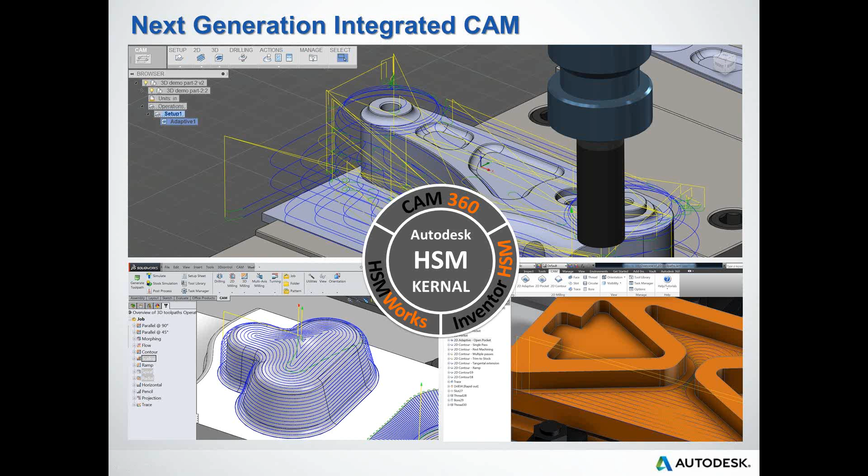Based upon our high-speed machining kernel, which is what HSM stands for, Autodesk has released 3 product choices for our customers: HSM Works, a fully integrated solution for SolidWorks; InventorHSM, a fully integrated solution for Inventor; and the first cloud solution, CAM 360, which you can do CAD and CAM with.

So why choose an integrated CAM solution? According to the July 2014 CIMdata report, the fastest growing segment in CAM software solutions is integrated CAM. Integrated CAM leverages the existing investments a company makes in their CAD tools. Because of this, the typical 8-step machining process, and of course the 16-step machining process where an ECO is involved, is greatly reduced when the CAD data is leveraged.

Reducing the steps to updating CAD data, regenerating and validating the toolpaths, and posting your code allows the NC programmer and design engineers to take control of their NC programming process. Many downstream benefits include ETO automation, streamlining communications, true work group collaboration, ECO accuracy, and faster turnaround time. There are a lot of players in the integrated CAM space, and Autodesk focused on just one, HSM Works.

The founders of HSM Works shared the Autodesk innovator vision. When you consider major advancements in the CAM industry, you will find an HSM Works founder behind them, including the birth of adaptive clearing, which became the basis on which high-speed machining, or HSM, was built, and a lot of first-to-market options, both technological advancements like distributed CAM and the first-ever CAD/CAM cloud option, and business benefits such as a free post library, open API, and flexible purchasing options to meet the nuances of each type of company.

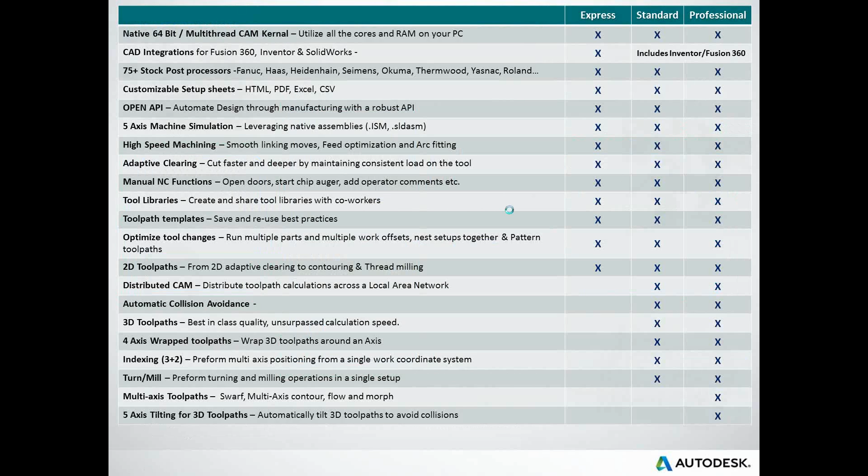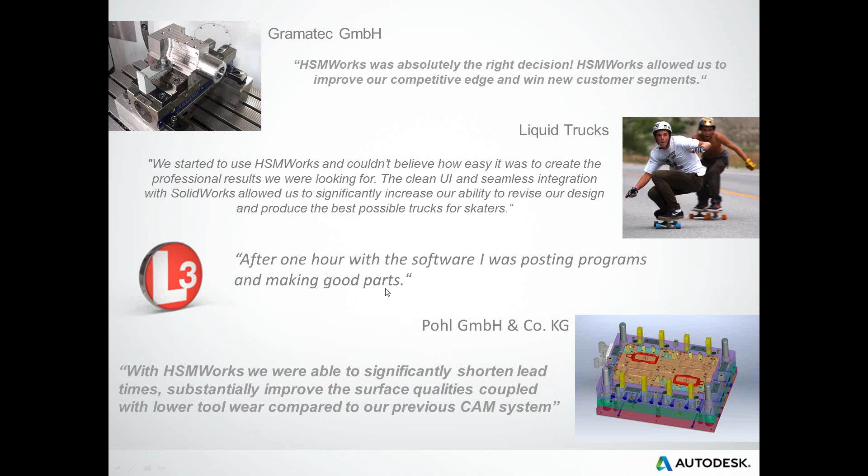These are a couple of examples of companies that currently use our workflow and the success that they've had. So now with that, we'll go ahead and move into our demonstration.

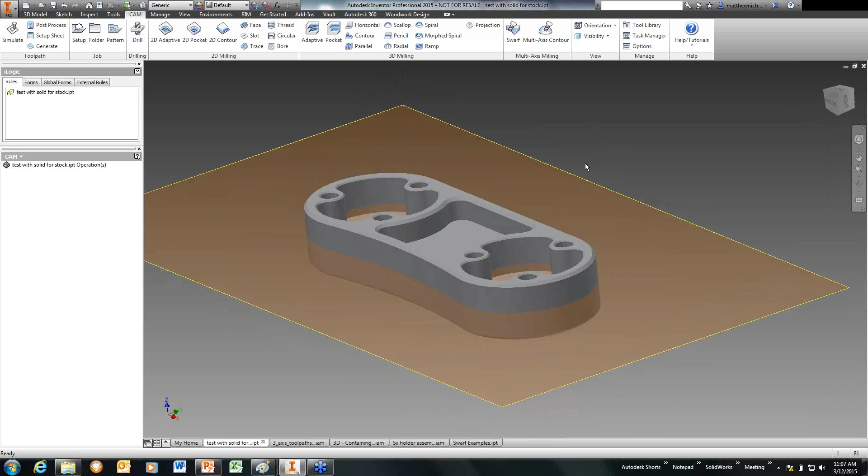So first what we're going to do is look at the 2.5 axis side of the program, just briefly. You'll see here I've got a part with multiple pockets and some drilling operations.

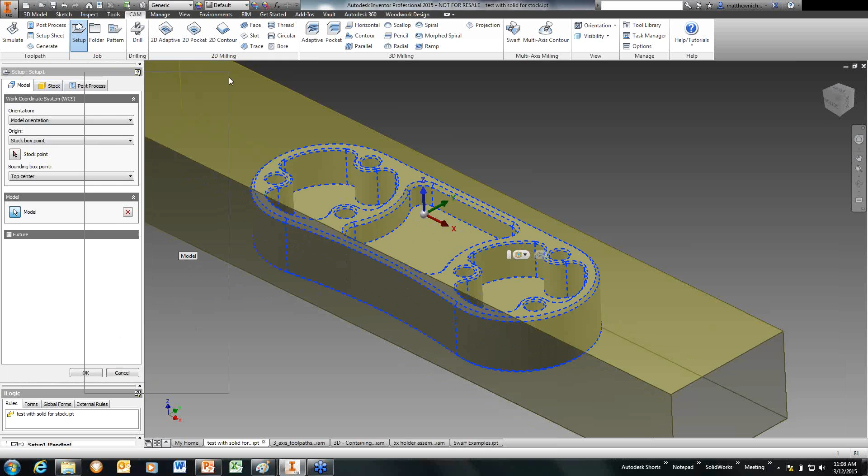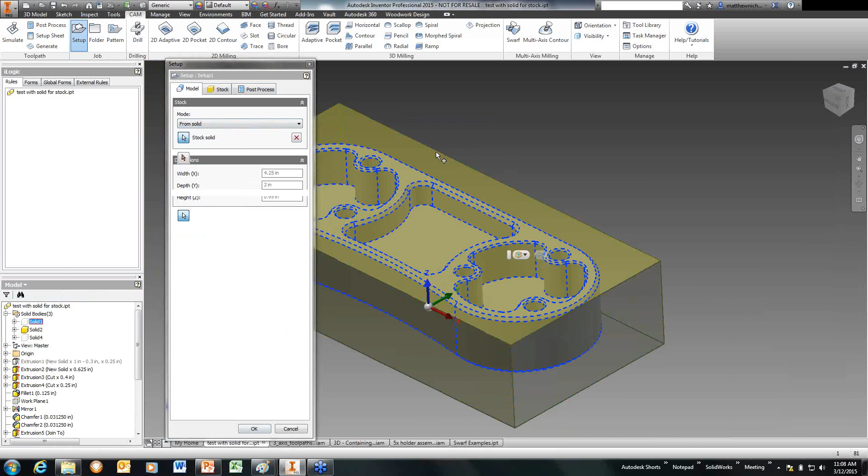So what I want to do is first create a stock setup. Here I'll select my model. One thing you'll notice is they've made it really easy to define your stock. There are multiple different stock options, and for this one I'm going to create a from solid stock, so I can go back into my model, which I've created multiple solid bodies, and pick my stock solid from there. Once I've defined my stock point for my work offset, I'm ready to go.

So I'm going to start off with a simple face milling operation. I'll click face mill, go into my tool library, click my 2-inch face mill, hit select, and hit OK. Notice how quick it generated that face mill operation.

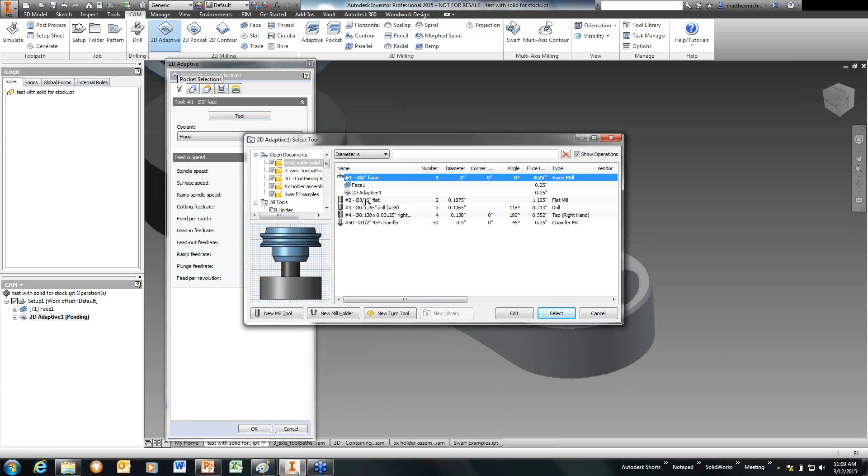Next, I want to come in and clear out these pockets. So I'm going to go into my 2D adaptive, again go into my tool library, pick my 3/16 inch flat mill, select it, and then I'm just going to select on the pockets, or I can even select on the contour. Click OK, and I've already cleared out the pocket.

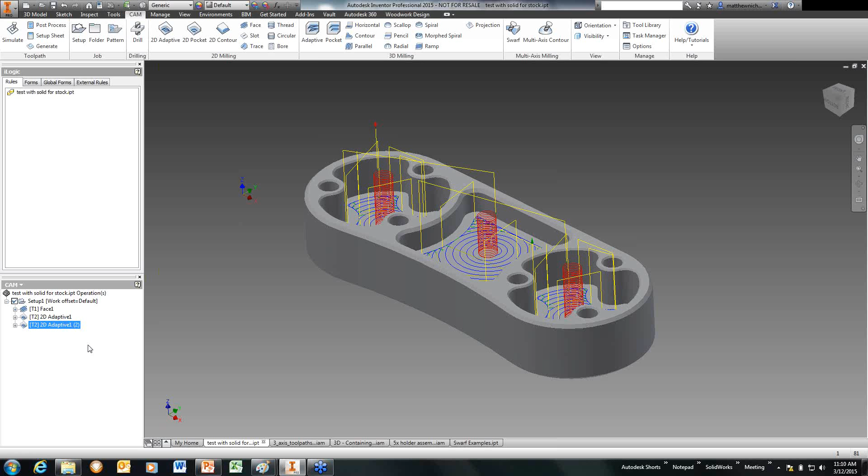Now say I want to go in and clear out the rest of the material around the outside. One thing you'll notice is if I make changes to feeds and speeds in here, say I come in and make it 7,000 RPM instead of 5,000, that modification won't automatically update into my library. So if I wanted to keep that change in my next operation, I can right-click and click Duplicate. This way it quickly makes a duplicate operation of what I just created, to where all I have to do is go into my Geometry tab, clear it out, and pick the outside of my part. So now, in a pretty quick 2 operations, I've been able to rough out the inside of the pockets and rough the outside of my part.

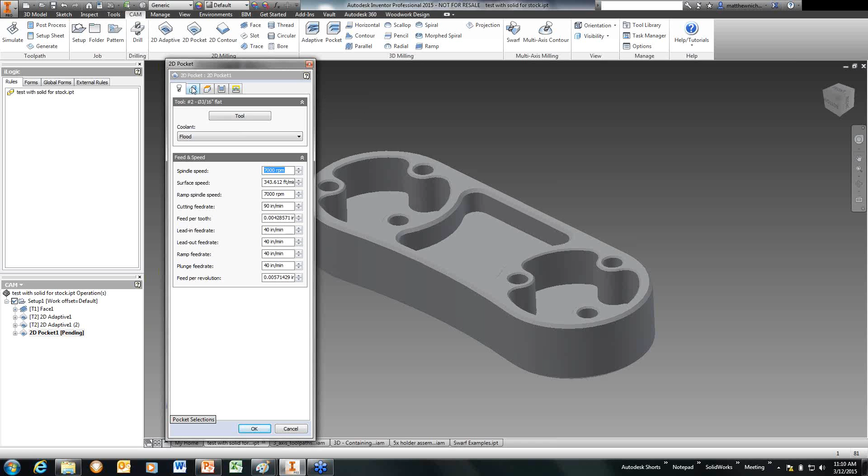So now let's say I want to come in and do my finishing passes. Again I can right-click on my operation and derive the operation into a 2D pocket. Notice my feeds and speeds stayed along with the tool and my geometry selection. So here what I would do is go into my Passes tab, which is what defines all the cutting parameters, and remove stock to leave.

Again, I can right-click on my outside pocket, or outside contour, and create a derived operation, and this time I'm going to do 2D contour. Notice the stock to leave was already turned off, so here all I have to do is hit OK.

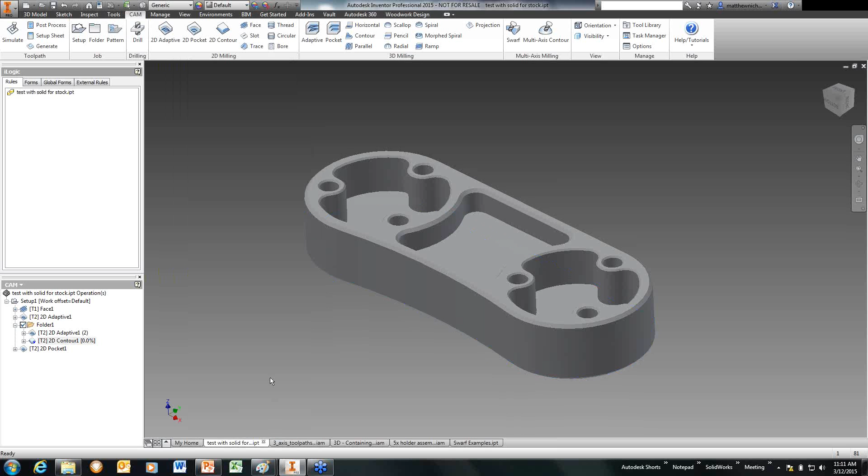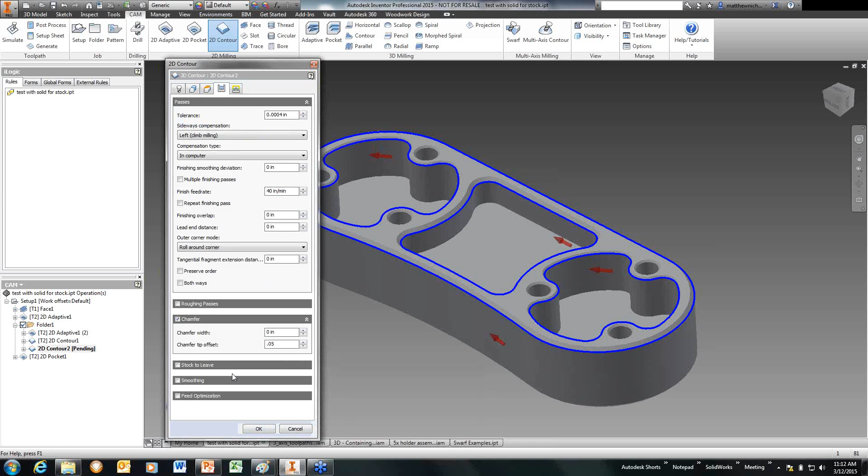So let's say I go in now and want to do my contour around the edges with the chamfer bit. I'll pick 2D contour, go into my tool library, and pick my chamfer bit, then select all my chamfers. Now you'll notice one thing Autodesk has done is they don't want to clutter your user interface, so never before have I had this chamfer option until I add it, so you're not having to go through all the options - they just pick the ones viable for that situation. So here I'm going to put an offset of 0.05 inches, click OK, and there's the toolpaths.

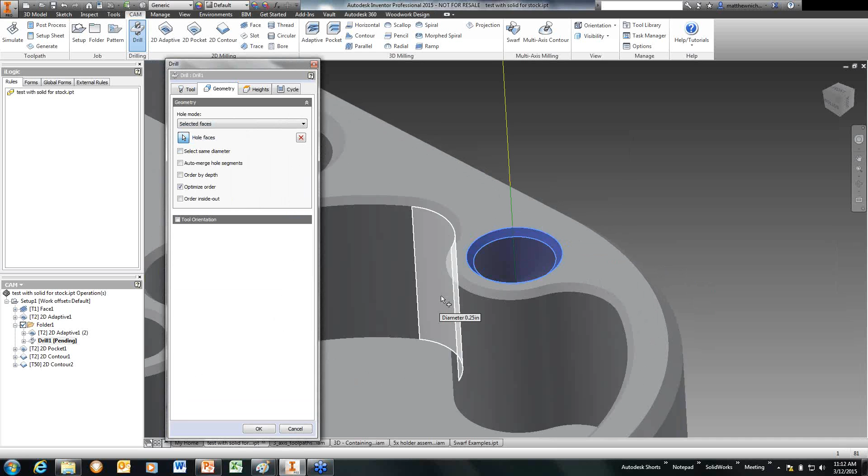So what I want to do is use that same chamfer bit, and I'm going to spot drill these holes. I'm going to go into drill, pick my chamfer bit, and all I'm going to do is pick the cylindrical face of one and select same diameter. So it goes in and quickly finds all other faces that are similar, so I don't have to go in and pick all of them.

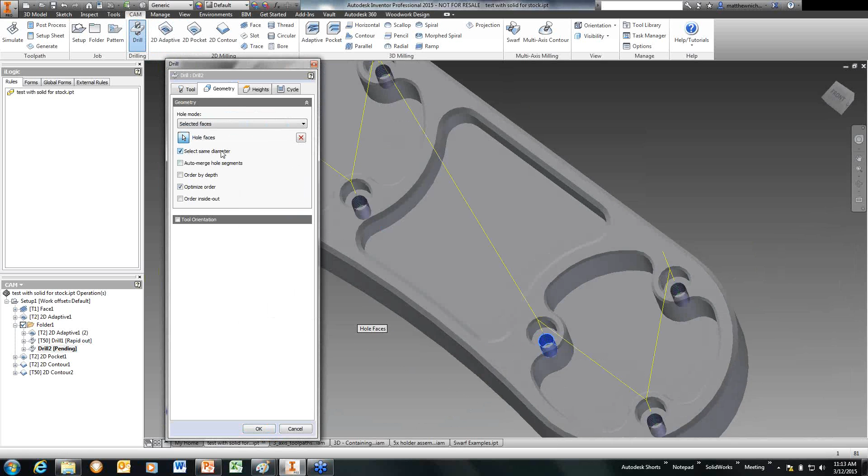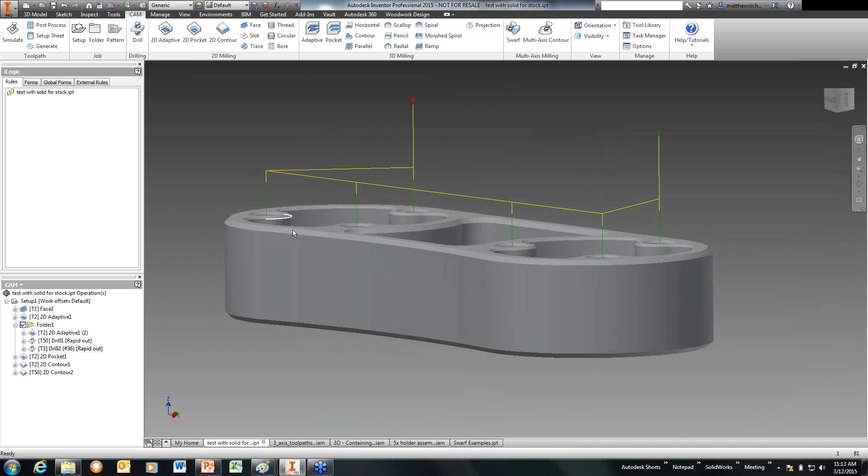Next we're going to go ahead and pre-drill the hole for the tap. Again, I'll pick my drill bit, select the small diameter, and I can do select same diameter. One thing to notice is the cut isn't going all the way to the top, but I want to make sure my bit's going to clear all the material. So I'm going to pick auto merge hole segments so that it finds everything, so I don't have to worry about losing bits in the process of machining this. And there we go - again, I can go into my tool library, pick my tap, geometry, select same, auto merge, and there we go.

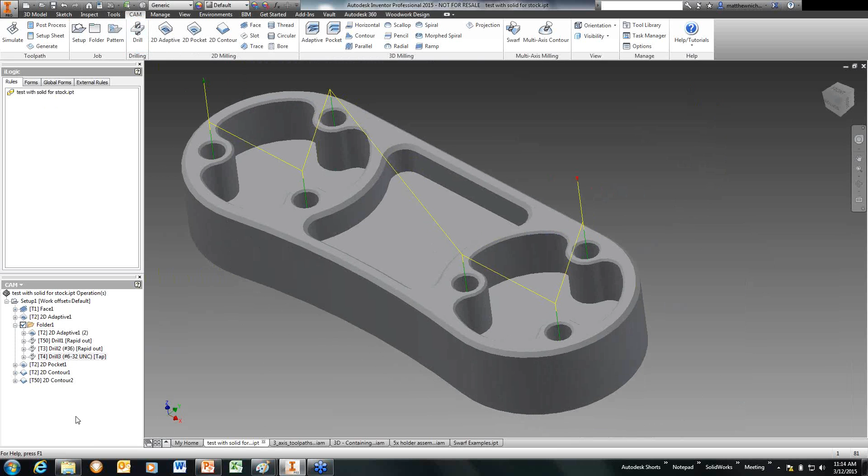So basically we've done that in just a few minutes - we've already machined that whole part. So now what I want to go ahead and do is a simulation to verify that I've actually cleaned everything out.

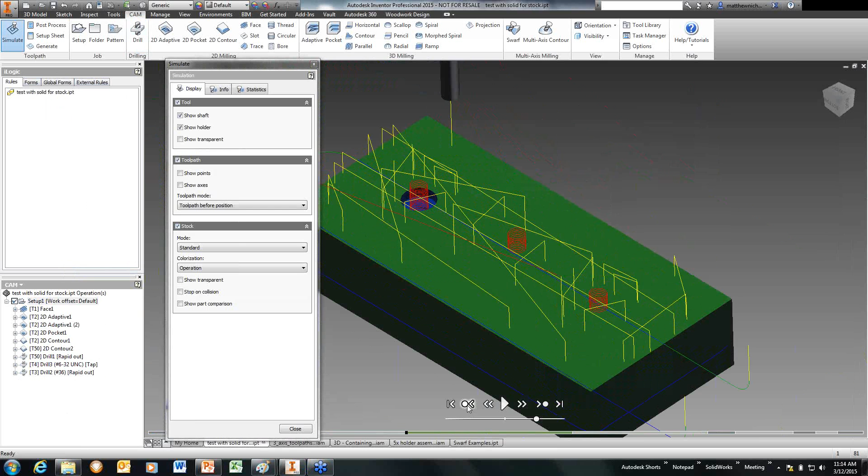So I'm going to turn on my stock and go ahead and simulate. Now one thing that's available in HSM Standard and HSM Pro is the ability to do a part comparison, where I'd be able to turn on and see the material that I have left to machine from what I'm wanting to machine to.

One thing also that you can do is you can make transparent your tools and holders. Now that this is done on the machining part, I can go ahead and do show comparison. So now you'll see everything in the dark blue is material that's still left on the stock comparative to what I'm trying to machine.

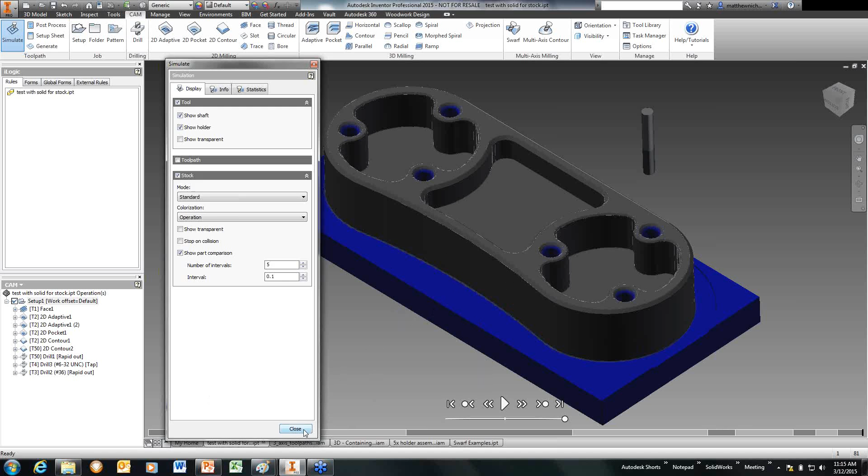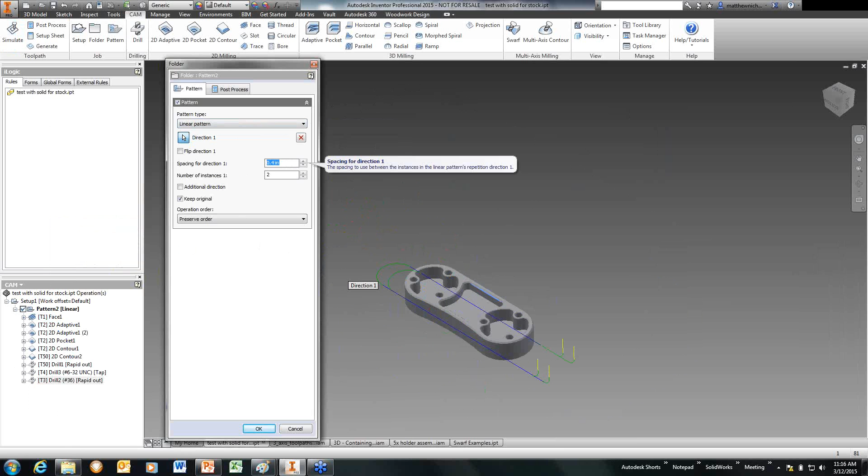Now another thing that you can do is, say you have a pallet situation where I have multiple of these parts sitting out. There's different ways that you can do patterning operations. One way that I can do that is I can select all my toolpaths, add a new pattern, and I can create either linear patterns, a circular pattern, or... So what I'm going to do is I'm going to pick this edge. I'm going to say I want to offset it 5, and say I want to do 2 instances. I'm going to say OK.

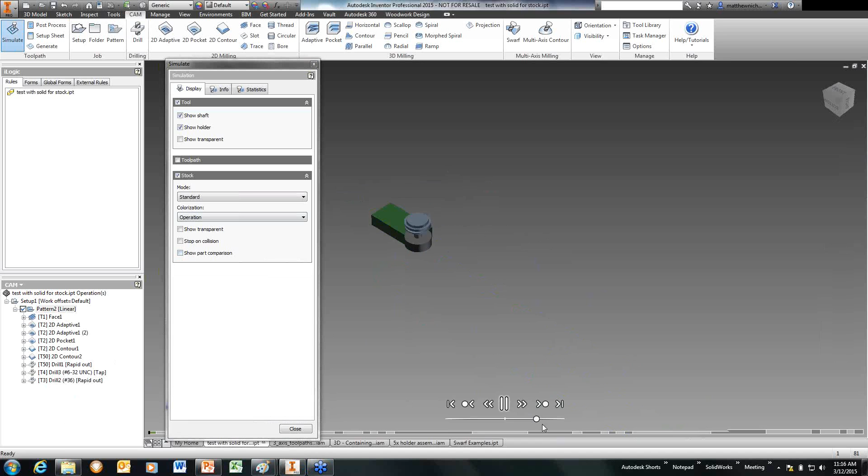So now you'll see that if I was to do a simulation on this as well, the stock's only going to show up for 1. But as you can watch, it does the simulation now on the side too. And if I show Toolpaths, then you'd be able to see it. So there's multiple ways of getting things done that are either the same, or even if they're different, you could pattern with those operations.

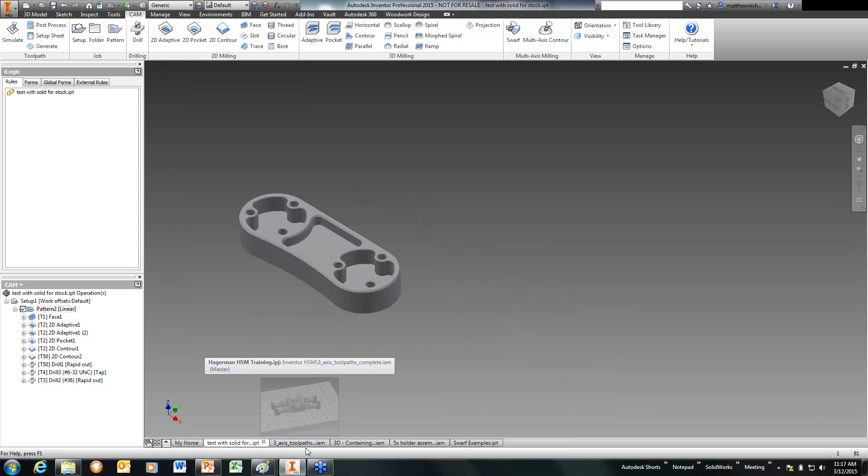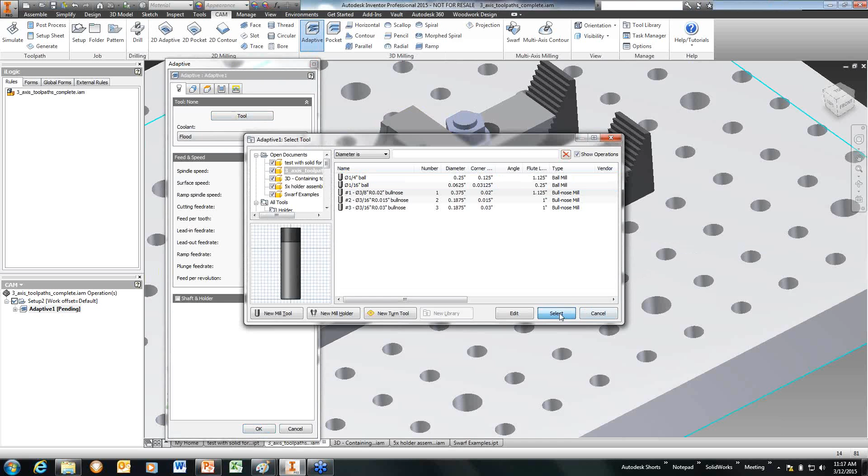Okay, so that's the basics of our 2.5 axis milling. Now let's go ahead and go into the 3 axis milling. Again here, I've got a die piece. I've already got my stock set up. So I'm going to go ahead and start putting in toolpaths. I'm going to go to my 3D adaptive milling. I'm going to select the tool, pick a 3/8 inch bull nose. And with this one, all I'm going to do is hit OK. And what it's going to find is all the open space that it needs to machine out. So there, within a few seconds, it's already developed a toolpath for me.

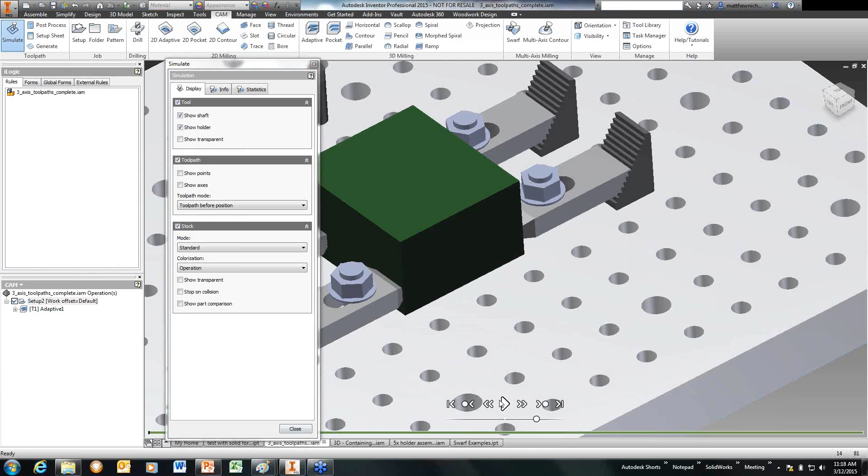So as that one's going, I can go ahead and start a new horizontal one. And I'm going to machine the top of this part, or the top of this feature. So with the same bull nose, I'm going to change my height tab to be just below the top of that part, so that it won't see the top. I'm going to click OK. And notice now I've got a horizontal toolpath on the top of that feature.

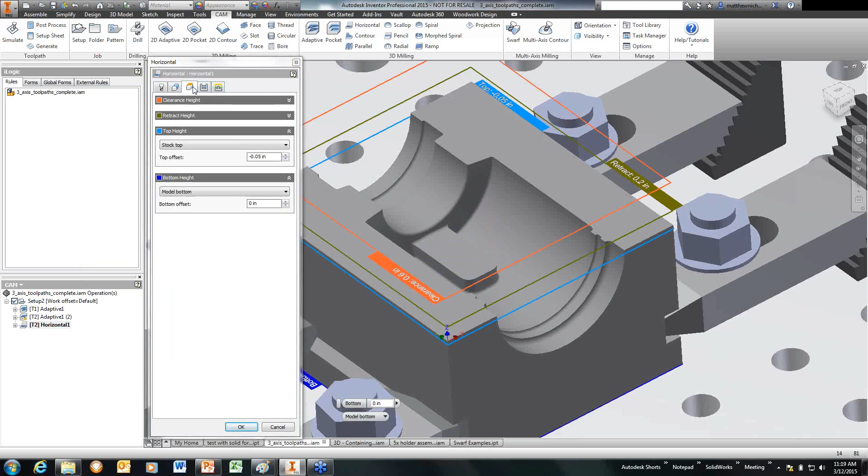Now I could also go in, instead of changing my height tab, I could also just pick the surface, and then that would do the same. It's already calculated for that second adaptive clearing that we've done. Now what I want to do is I'm going to go in and start doing my finishing passes. So what I want to start with is a parallel move. And for this one I'm going to do a 1/4 inch ball.

And then what you'll see over here is I've got the option to do slope now. So I'm going to do my slope. And I'm going to change my to slope 35 degrees. So now with that, notice it's gotten the top of the part, which I'm not wanting, but now I've also got my contour down in here. So let's go in and edit this real quick. If I go back to my geometry tab, you'll notice it's avoid touch surface. I can click the top of the surfaces that I don't want to touch.

And let's say I want to change my step over. So I've got a 0.125 step over. Let's say I want to do a 0.05. And so now you'll see it's missing the top, and the top of that surface. It's turned 35 degrees, and I've got a finer step over than what I originally had.

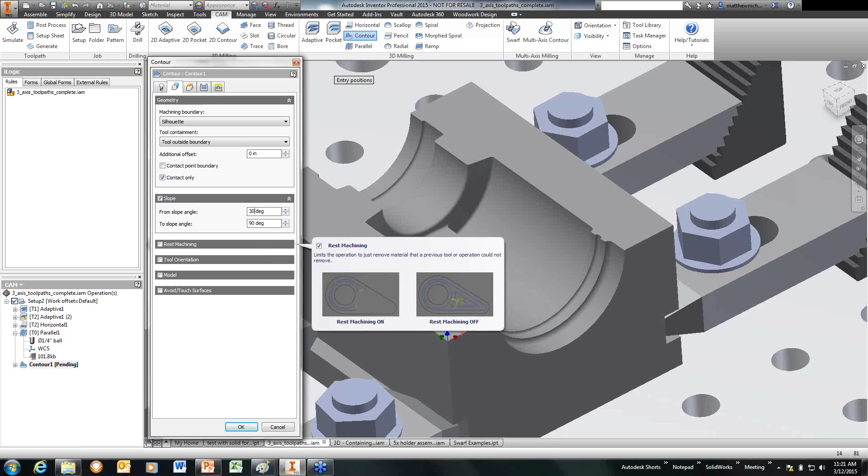So next I'm going to go into the contour with the same 1/4 inch ball. Again, I'm going to do a slope. This time, instead of changing the to slope, I'm going to change my from slope to 30 degrees. This way I have a 5-degree overlap, so I make sure I don't miss anything.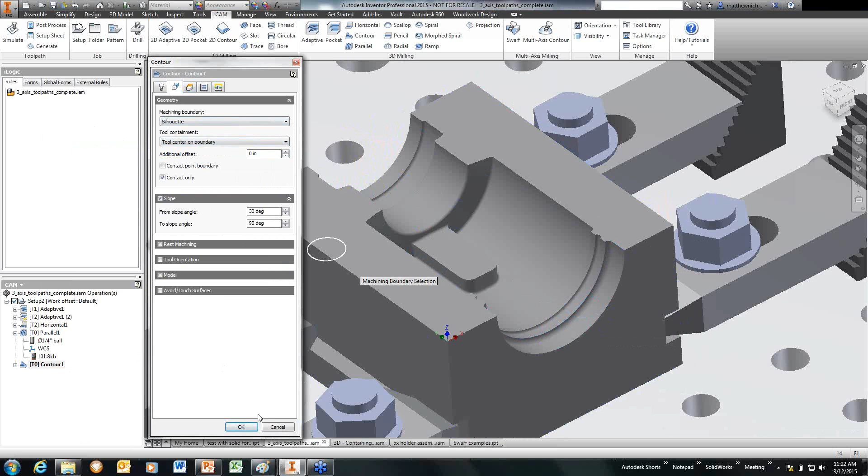Okay, so you'll notice that I got the outside of the part. Now, the way to get rid of that is tool containment to center. That way the center of the tool goes to the edge of the part. It doesn't go past. And finish that again.

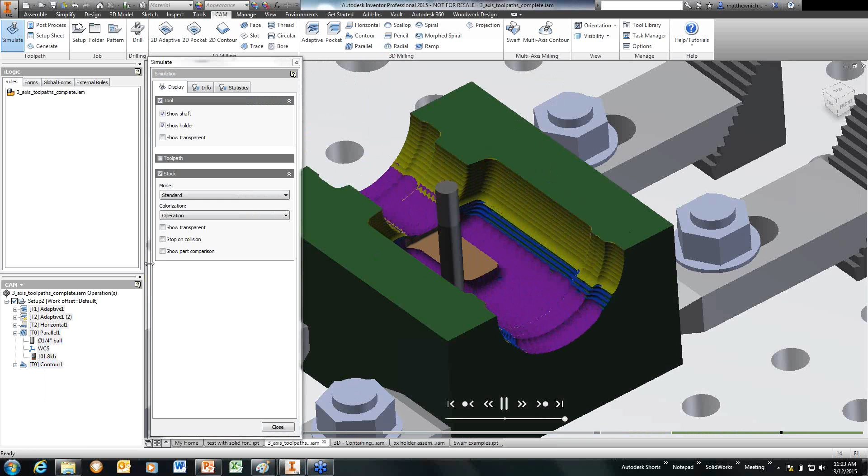And the last thing I'm going to do is, if I go ahead and simulate all this, that will be in here and here and around in this area. So what we're going to do with that will be a pencil command so that we can finish those radiuses off and finish the part. So notice the dark areas and the radiuses.

Okay. So with that, I'm going to go into my pencil operation, pick my 16th-inch ball mill, and I'm just going to go ahead and hit OK and see what I get. So I've got the smaller radiuses, but I'm missing the larger radiuses. So let's go in and edit Toolpaths.

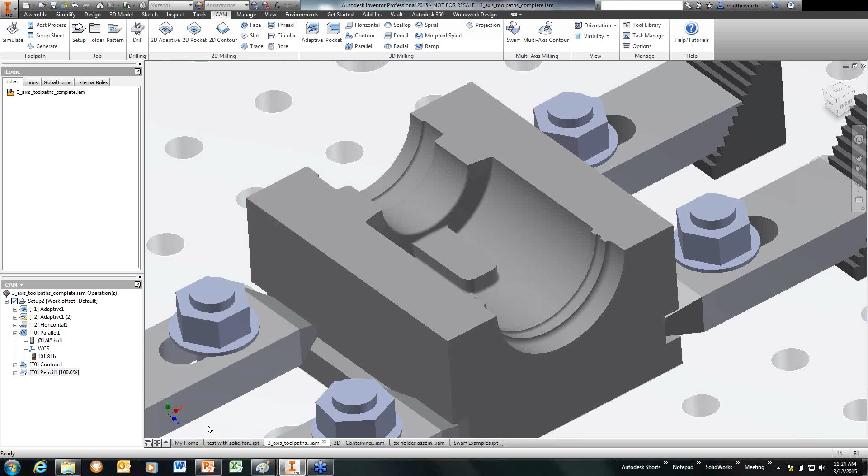So I want to come in here and change my over thickness to 0.125 so I can find the larger radiuses. And I'm going to change my step over to 0.02, and I'm going to limit the number of step overs to 4 so that I don't go too crazy. So then you'll see once that gets done calculating that I've gotten all my radiuses, got 4 step overs, and it's a really fine finish.

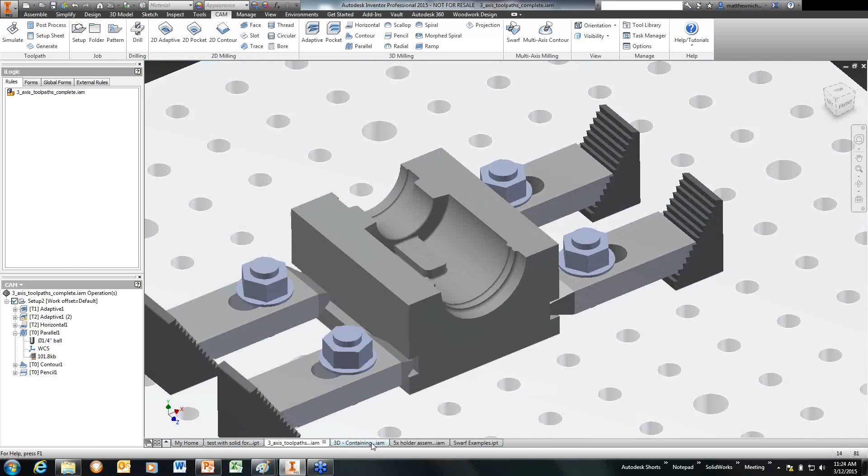So that was a pretty quick and easy way of being able to mill out that die in a little number of steps. So next thing I want to do is show some of the other capabilities that 3-axis milling has. So you saw earlier I used the parallel command to do some of the finishing on different slopes. So here's a way you can see parallel going over the whole part.

And then here I'm containing it to a certain pocket. So by selecting the geometry around the pocket, it limits it to that area. I can also limit it by selecting certain geometry. And then the outside of the part, it's going to contain it to just that area. And then also if I do this, I'm defining my top and bottom height, so I'm containing it to a certain section of the part as well.

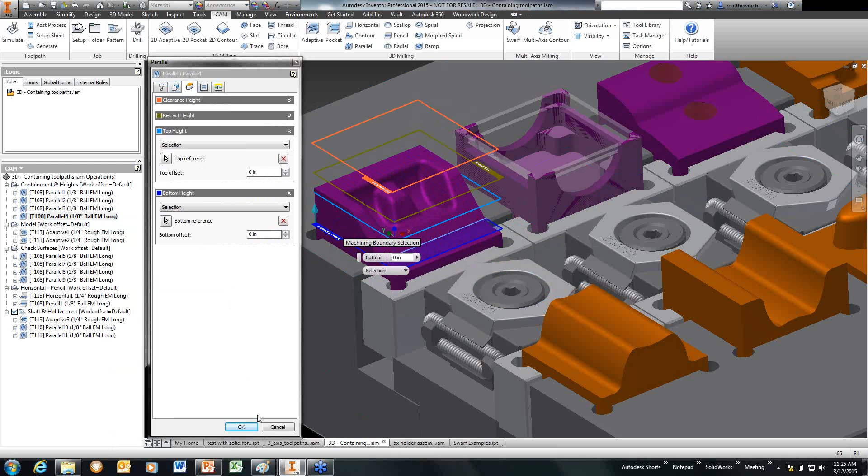Now if you have a part like this one, where it's got cuts through the outside of the wall, but you're not wanting it to mill that way at first, as this one does, you notice whenever it goes in to mill this part, it cuts through the outside of the wall. Say I wasn't wanting to do that whenever I first cut that part. I just want to hog out the inside and then come back and do a cut to finish the outside.

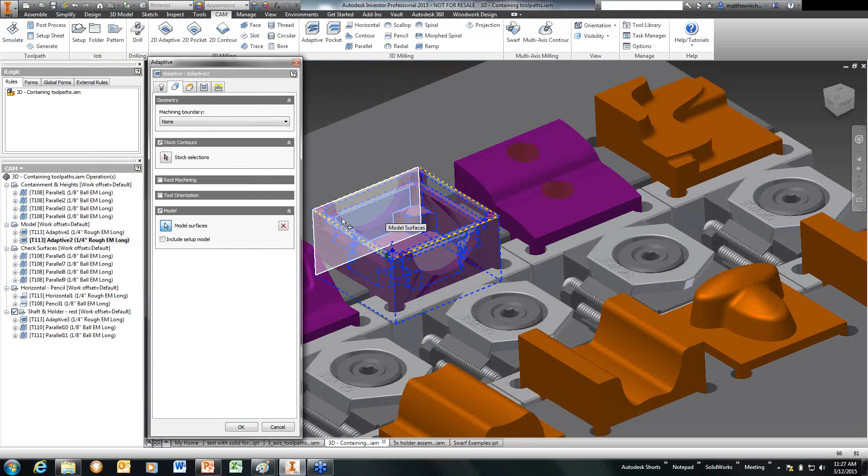If I go in, notice I've got kind of a transparent body on the outside that's the same size as the part, same features as what I want to be machined from, so that it's not actually machining the outside. So then by doing that, I'm able to rough out the inside of it without disturbing the wall structure.

Another one is check surfaces. So say you got a part with a hole through it, like this one does, and you see this parallel goes down into the hole. The way to get around that, or to go over that, is to create a surface that just covers the top of that pocket so that it recognizes that. And by doing that, I can select it as geometry that I want it to include so that it mills that out without going into that pocket, so I can drill that out later.

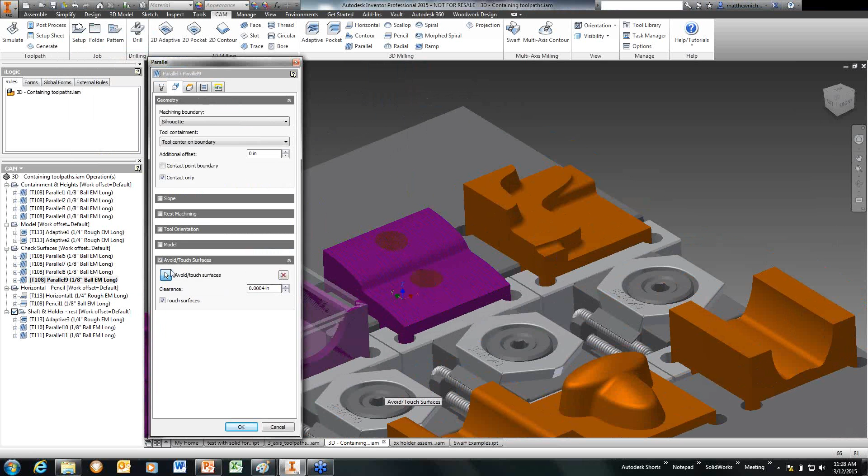And then again, you can do it with the surfaces so that it just goes up to it and doesn't actually touch it at all. Or I can tell it just to touch those surfaces by themselves, and it doesn't even touch the rest of the part, by turning on touch. And notice I've got those two pockets selected.

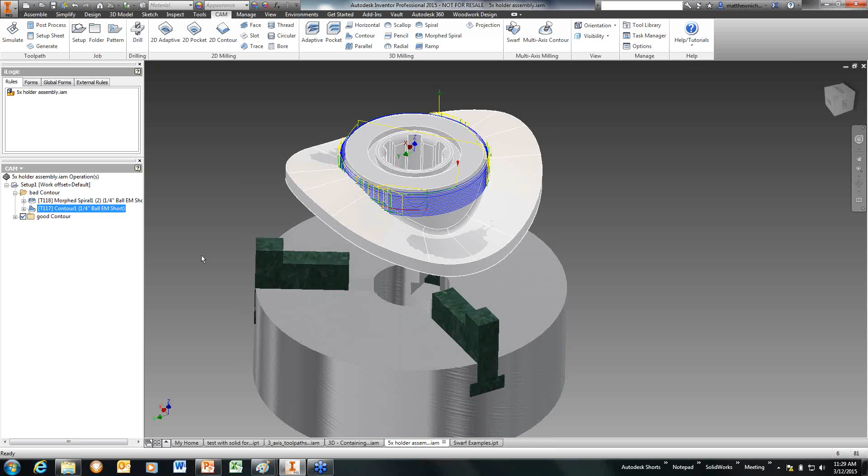Okay. Now let's go ahead and look at some of the capabilities that have been added with the HSM Professional version. So one thing you'll notice, I've got my part in the wall. So I've got my morphed spiral, which machines that contour. And I've got my actual contour that I'm trying to use to machine the outside of this wall, or this diameter of the stock. So what you'll notice is I've got that face selected as a touch.

But what I've got here is this shaft and holder option turned on. So if I want to make sure that I'm not hitting the shaft of the tool or the holder on the stock or the model of the part, I can turn this on. I have multiple different options. As you can see in the pull-down, I can do a pull away, which will pull the tool away from the model so that it doesn't hit.

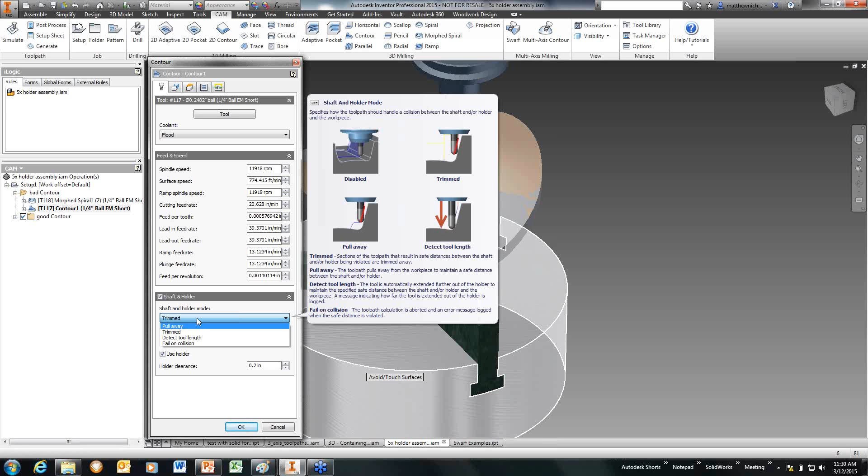I can do a trimmed option, which limits the length of the tool path depending on where the shaft of the tool or the holder would hit it. Fail on collision does what it says. If it detects a collision with the shaft or the holder, it automatically fails that tool path. So for this one, I've got it set to trim.

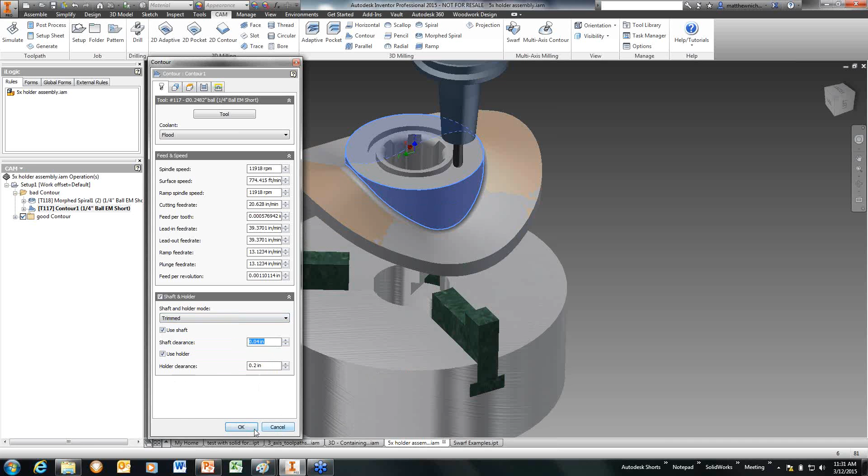I've got my shaft clearance at 0.04 and my holder clearance at 0.2. Now what you'll notice is with that trimmed option, I've only gone halfway down, three-quarters of the way down that part, but I need to get the rest of this.

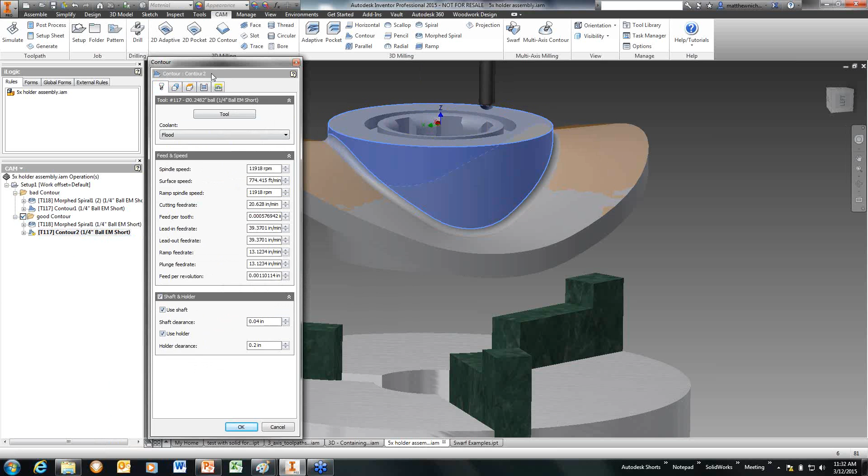So if I do a contour command, the new thing with HSM Pro is the ability to have this multi-axis tilting. With that multi-axis tilting turned on and your shaft and holder options still turned on with the same parameters, I'm able to tell it if you hit the stock or the model, tilt so you can clear it. So I've got my maximum tilt angle set to 90 degrees. What you'll see is I'm able now to go all the way down to the bottom of the part where I need to get a smooth finish.

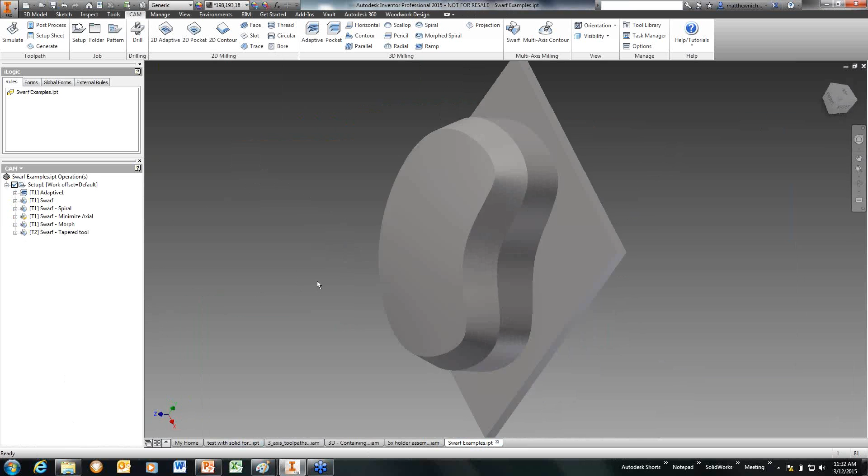Now next we're going to go in and look at some of the multi-axis milling operations. So with HSM Pro, you get this panel on your ribbon with swarf and multi-axis contour.

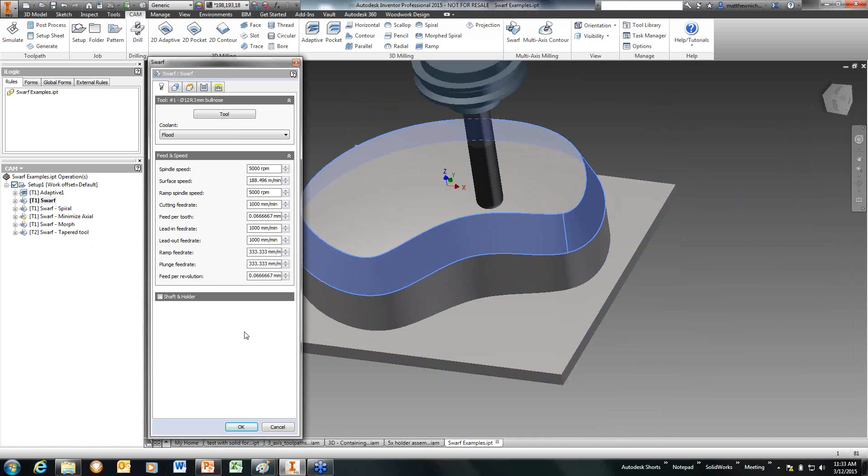So I've got this part set up. I've done my adaptive clearing to get most of the material off. So now I want to go in and create some finishing passes on it. With swarf, there are multiple different options again - it's not just one toolpath. There are multiple different settings that allow you to do what you need to do. One great thing about how HSM works is whenever you hover over any option within your toolpath, it gives you a pop-up that does a very good job explaining what you're actually getting.

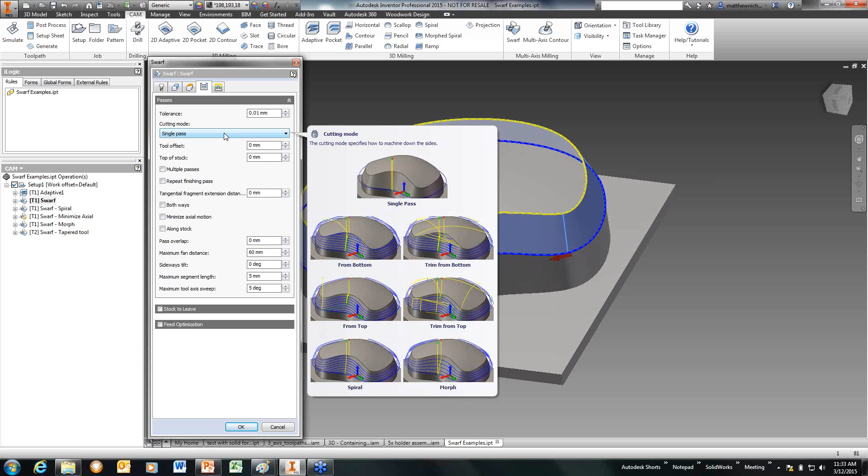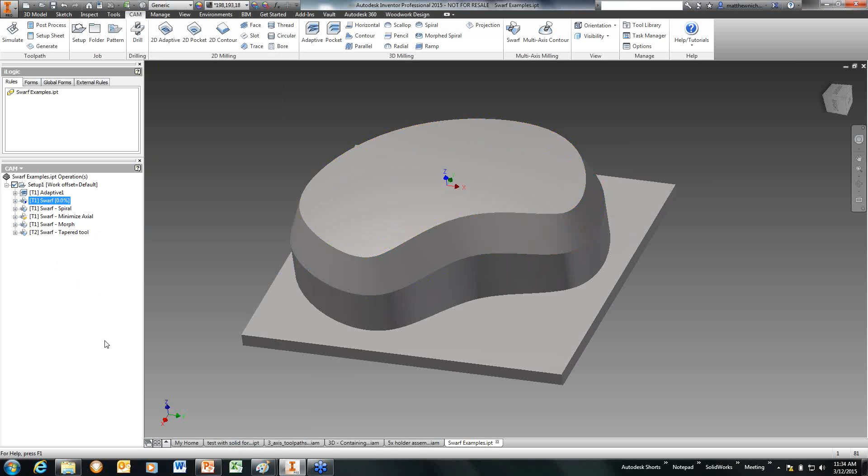So you'll notice this one I've got set up as a single pass. I come in here, pick my surface that I want to machine. It's driving by contours, and my selection mode is faces - again there are different ways you can do it. I can do either contours or surfaces. On my selection mode, I can do faces, contour pairs, or manually. So that's a swarf single pass.

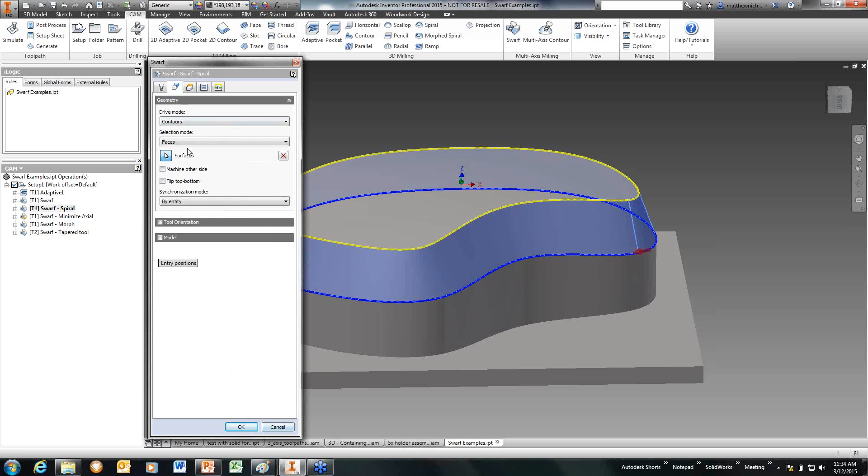Now if I go into the swarf spiral, this is what you would get. With this one, I've got my step down set, so it knows how far to step down as it goes. And again I've picked it by this face. So this one is minimizing axial, which just minimizes the amount that it goes into that curvature, as you can tell by the toolpath.

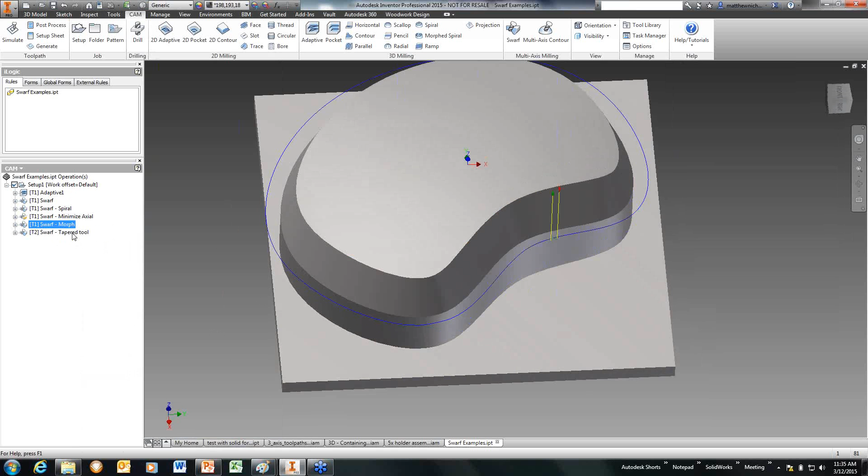And then I've got my morph move, and on this one I'm using an actual 5-degree taper tool. So if I was to go in and simulate this one...

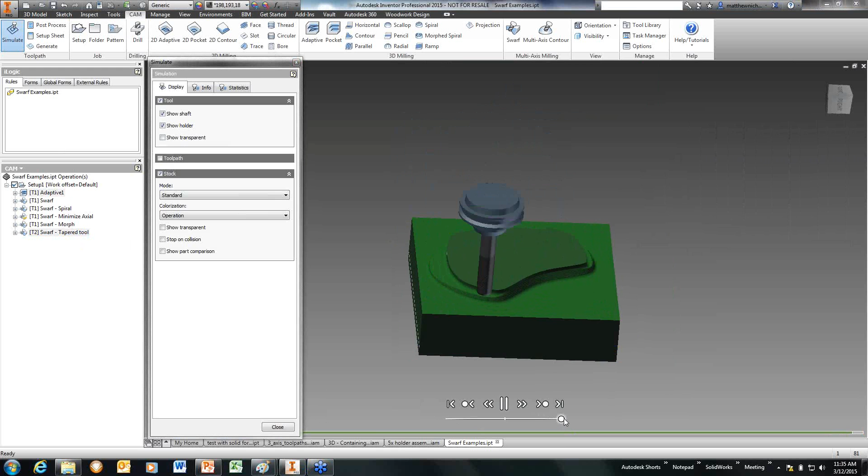Again, I'm doing my adaptive clearing to remove the excess material to get it down to where I can do my finishing passes.

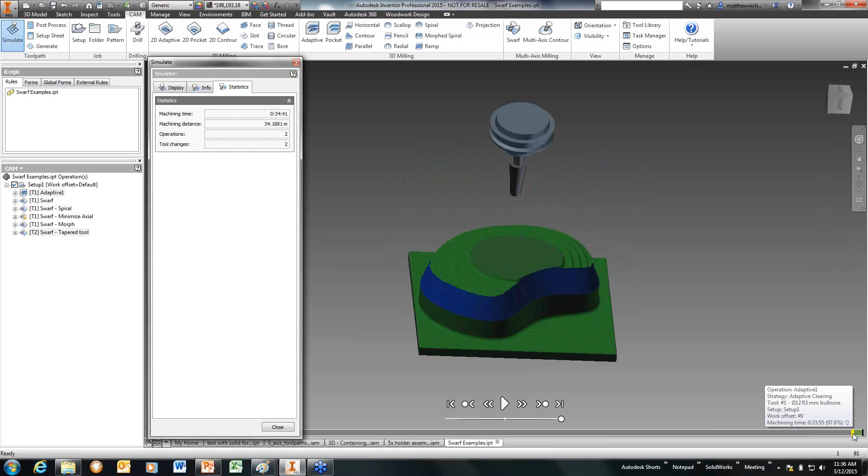So while doing this, there are 3 different tabs you can use within the simulation. The Info tab gives you all the XYZ positioning, the operation information, and also information about the toolpath, giving you an idea of what the machining time is. I'll do this one - notice with this one I've got a longer time, showing 2 operations and 2 tool changes.

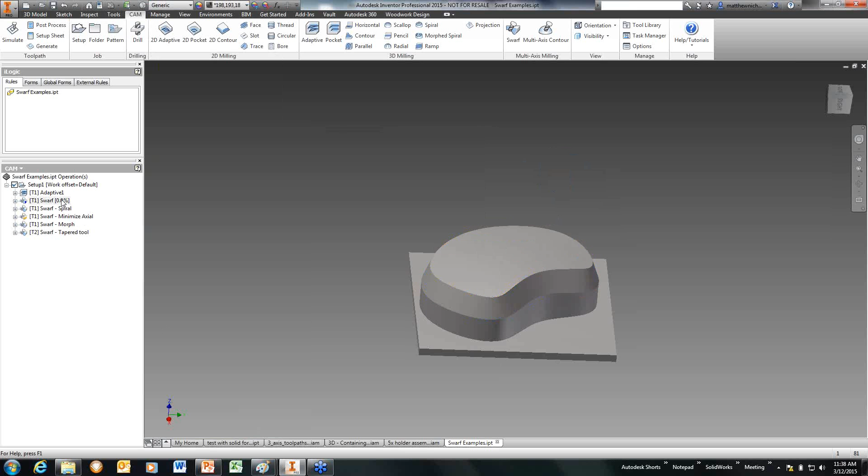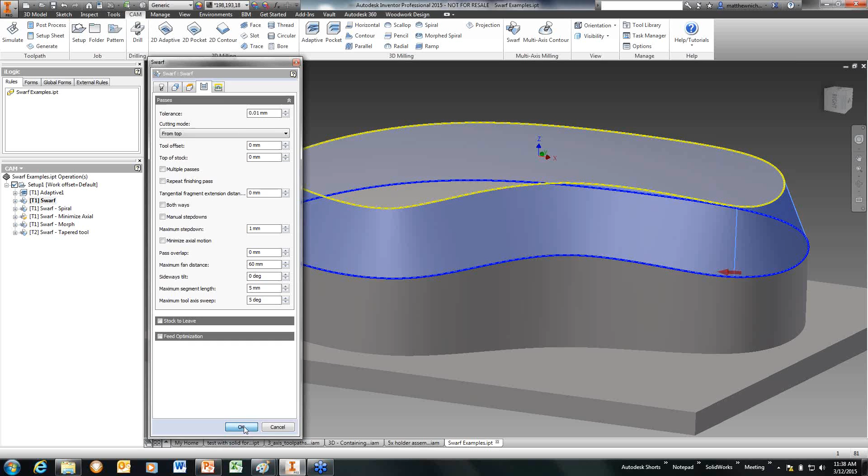So one of the things we didn't show was if I do a from-bottom operation, you'll notice that the toolpath actually does the swarf around the tool. And then if I come in and change this from top instead, you'll notice the blue lines are all my cutting moves, but I've got this little green line, which is my ramping operation down into where I'm starting at. So I'm coming in here, ramping down to the bottom, and then it's going to be cutting to the top.

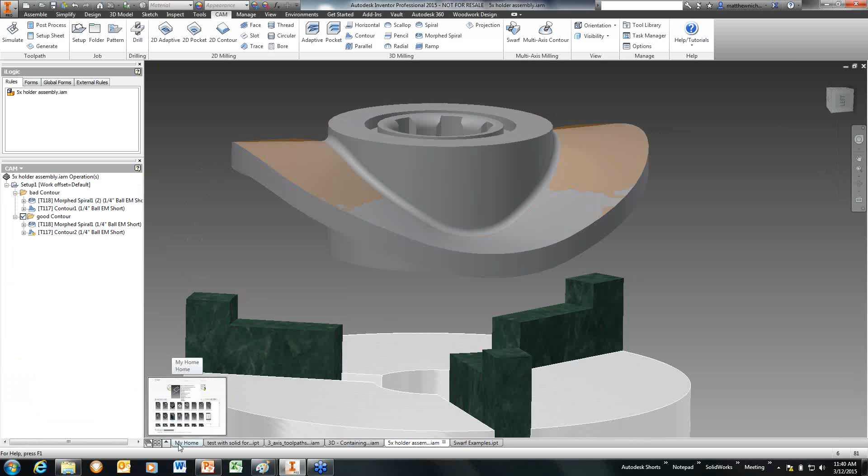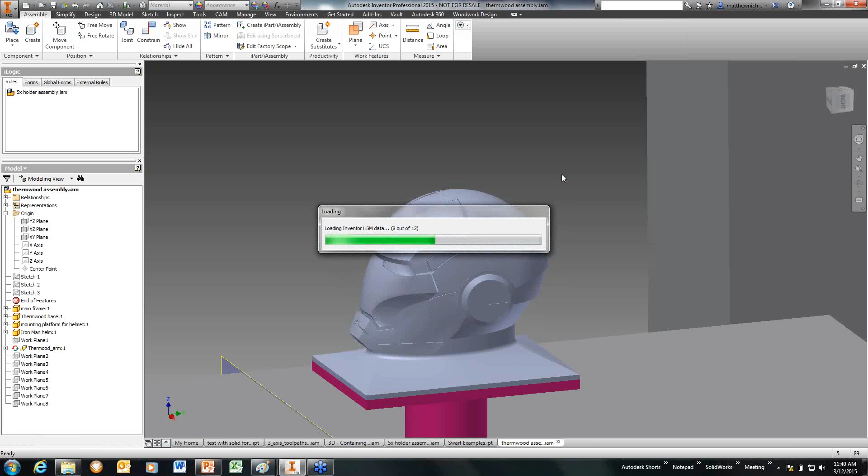And one thing I was going to show was the ability of 3+2 machining. So here's an example of how you can do 3+2 machining on a, I would say, very complicated part, but not have too many operations, and how easy it can be by controlling where you're machining using sketches.

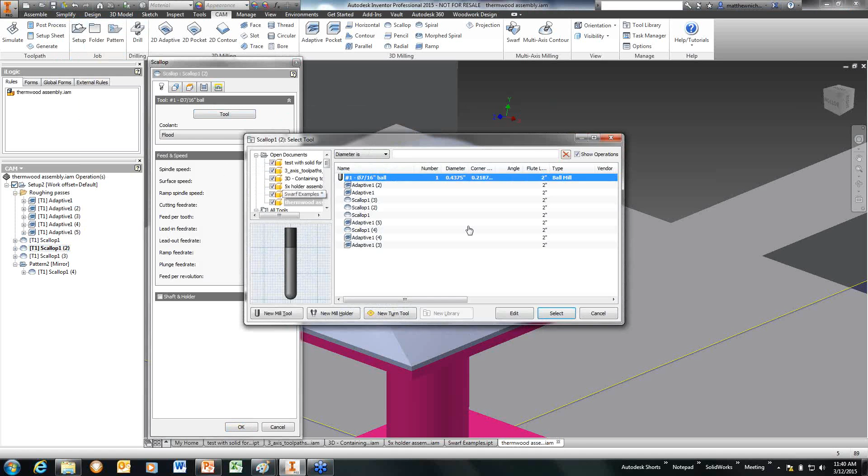So let's go in here. In my tool library, this one I've got a 7/16 inch ball mill. But you'll notice in my geometry, I've actually created a sketch part to define the area that I'm wanting to machine. So what you can see here by this outline, I've got it there. I've got a 15-degree plane that I've created as well for it to orient the tool off of, which you can see by the work coordinate system axis.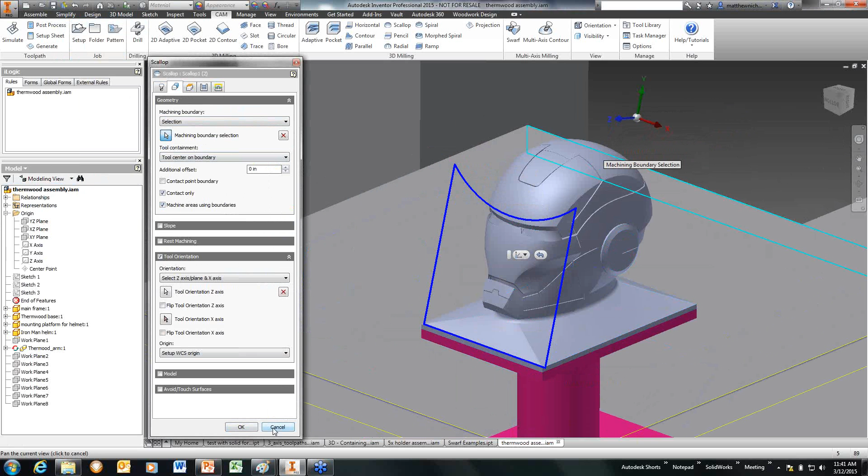One thing you'll notice is the ability to create your custom libraries the way you need to. So if you're an ex-Mastercam user and you have Mastercam libraries to transfer over, afraid it's not going to work, you can create new libraries by importing. I can create values by an Excel sheet, and then import Mastercam tools and holder libraries, so that you're not losing any information and lots of work you've done in the past creating those.

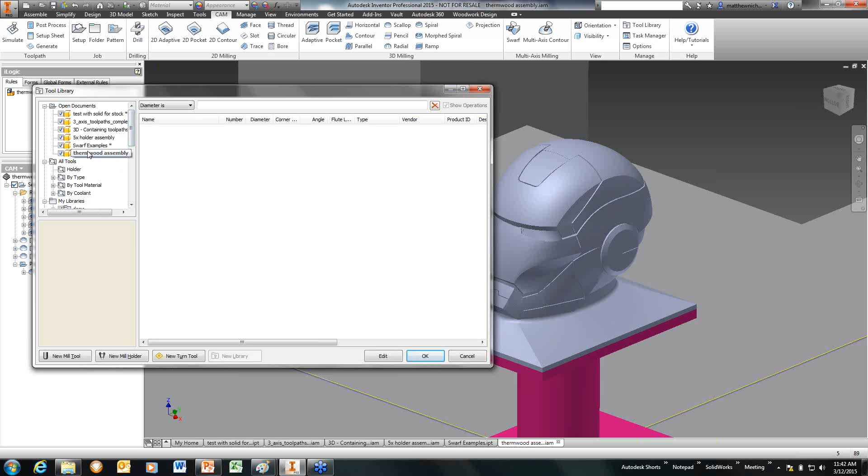Plus, you'll notice that all these tools are stored within the parts. This is one great thing: if you use a tool in a part and make a modification, like on this one, I made a modification to the spindle speed on this adaptive. You'll notice the tool itself shows 5,000 RPM, but the actual operation shows the change I've made. So it's not modifying the actual tool in your library, it's just modifying it for that operation.

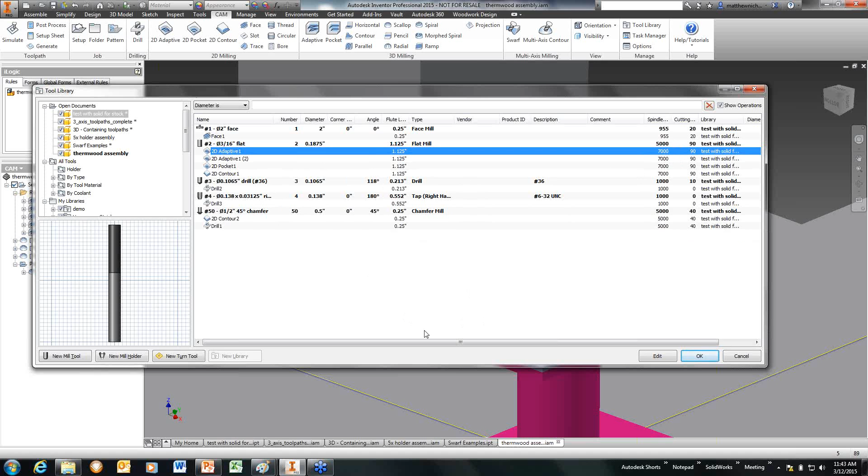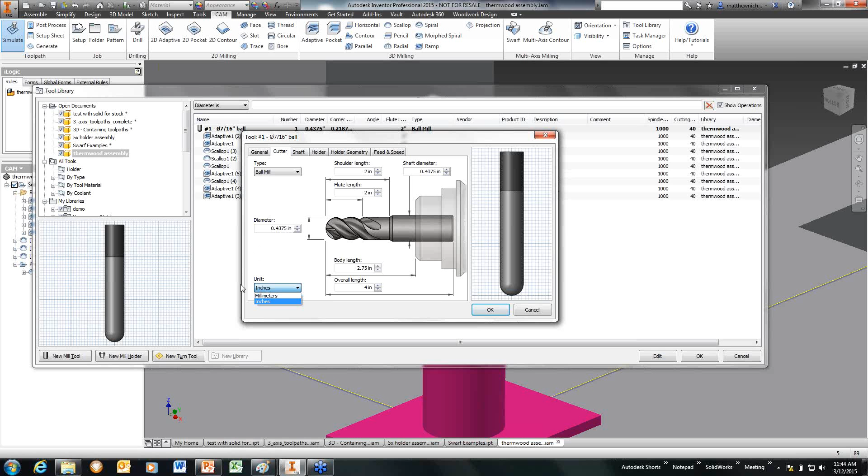One thing I'll mention on the tool library is that it doesn't matter the type of units you're using. The units are all derived off the units of the part or assembly file you're using. So if you have inch, it'll go by inch; if you have metric, it'll be metric. Also, within the tool, if you go into the cutter tab, you can change your parameters for that as well.

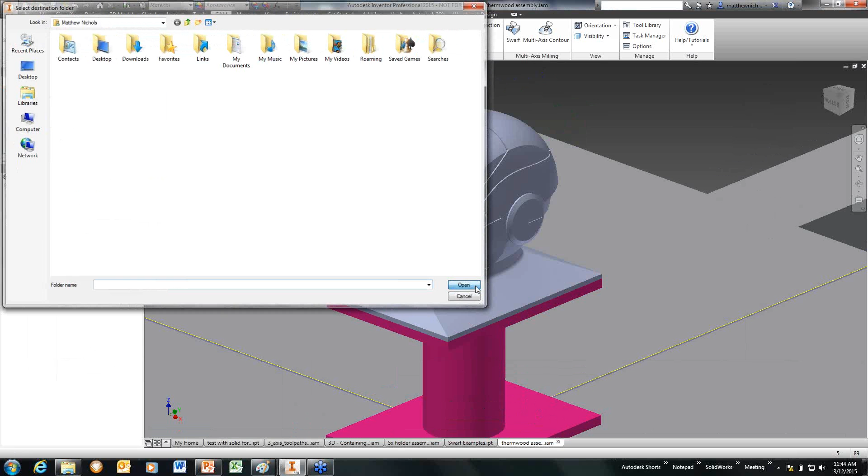I'm going to go ahead and show this. One of the great things is you can create setup sheets for your machinist, an HTML file that you can print out. Here you get your work coordinate system, the stock dimensions of your part, the number of operations and tools, and information about each tool being used within that process.

Another way, if I go into my post library, I can also post out using this as the setup sheet to Excel. This way it'll actually post that setup sheet into an Excel file where you have three tabs that can be printed out and used by the machinist. The only major difference between that and the HTML is you don't get the images.

You'll also notice that with the program, even the free version, there's this whole library of posts that comes standard with it, which is a very vast library. Let's say I'm going to post on a Haas. It's probably one of the best ones out there.

There's so many different things that you can do within the editor that make it so easy to use and make it so easy for you as the user.

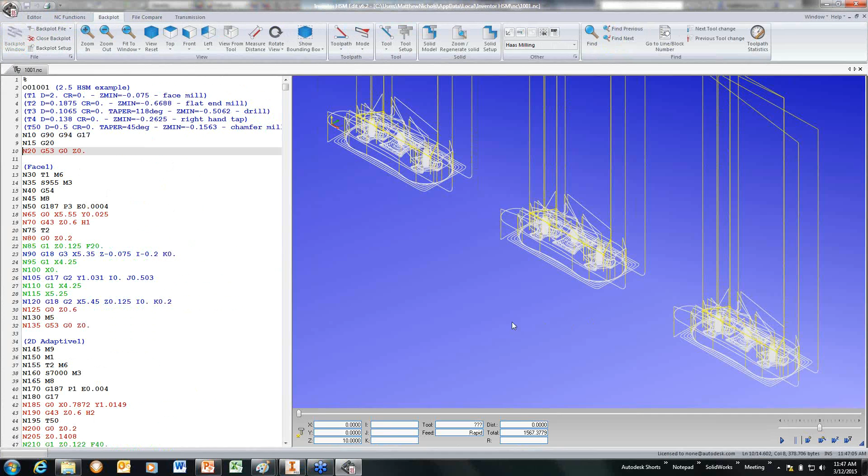One feature that I absolutely love is this backplot window. Because here I can run through my lines of tooling, and if I see something I want to make a change on, I can pause it in motion, and I see that I'm at line 77. I can change a variable in here if I want to, and then just keep going. So it makes it easy to do on-the-fly changes if you absolutely have to.

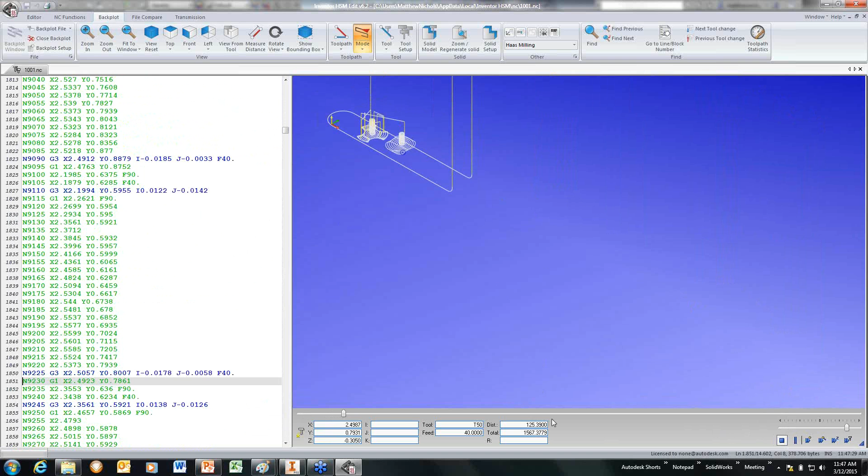Another great thing is I can do comparison of files. Say you have one NC file that you posted and the machinist made a change at the machine. You can bring them both back in here and compare them to see what the differences were, so you can make sure you have an up-to-date post file. I also have the ability to post straight to a machine from here.

A couple other things: I can renumber, and I can tell it to block skip if there's a certain area I don't want it to do. So there's many other things in here that make life simpler for you and your machinist.